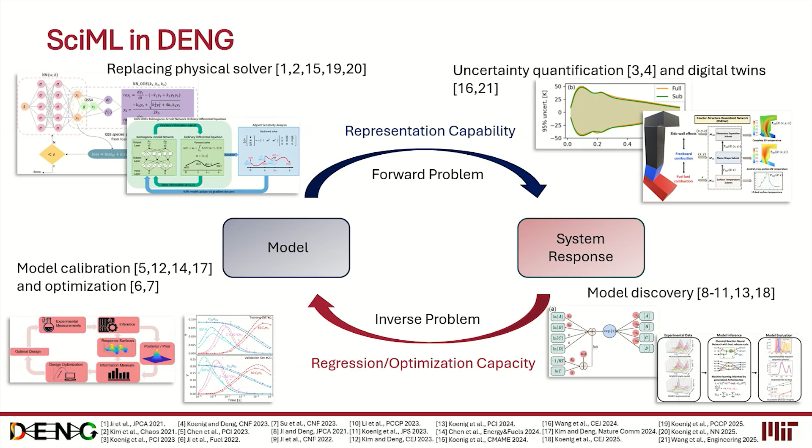So in that case, I'm thinking for the machine learning side, we can really utilize the capacity in terms of representation, try to help us compute things faster, more accurate, and so on. And eventually, if we can build something called the digital twin, which I will talk about later, such that we can predict what's going to happen to the physical system, we have a better chance to control that.

So towards this, for the past 4 years or so, our group has conducted a lot of research tasks surrounding these forward and inverse problems, particularly trying to infer models from experimental measurements and try to fast forward the computations and be able to model the entire systems.

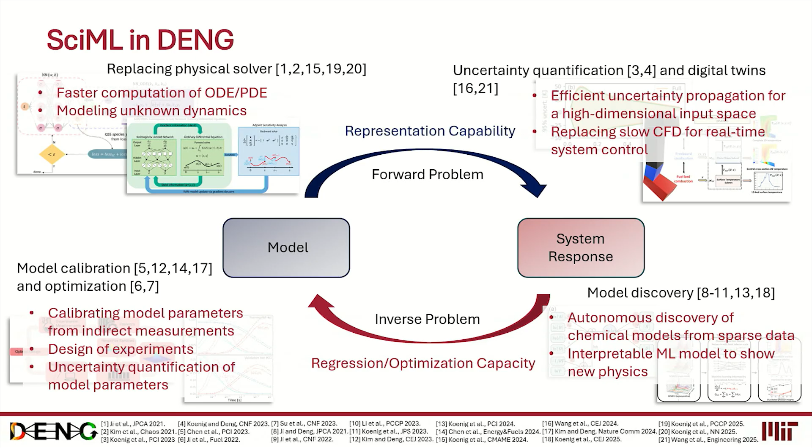In today's presentation, I'm going to pick 2 stories to share with you. Specifically, one on the inverse problem is that we want to see if we can predict the thermal runaway for lithium-ion batteries. And the second is showing you some of our recent work on trying to build digital twins to describe combustion or general combustion systems.

In terms of lithium-ion batteries, I don't think I need to emphasize the significance of that and the increasing trend in terms of deploying a lot of lithium-ion batteries for EVs as well as for grid storage, right? But we also hear about scary news about electric vehicles catching on fire, data centers just catching on fire without any physical destruction of the batteries, right?

So not only can we mechanically abuse the system, such as introducing a crash to the batteries, but also with batteries just working on their own or even sitting there, there could be some self-heating process going on such that it can trigger the so-called thermal runaway and eventually trigger fires of lithium batteries.

As we probably already know, lithium-ion batteries have many components. It has a cathode, anode, electrolyte, and also some intermediate species, such as the interface between the electrolyte and the anode, right? That's called the SEI interface. So actually, all of the components can undergo heat release processes under different conditions.

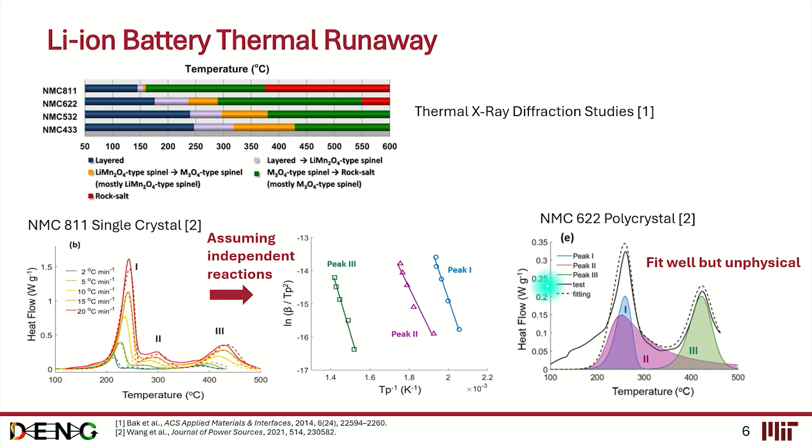However, it's unphysical. You can take a look at the second, this purple-colored shaded area. Basically, what this means is that the second stage decomposition starts to happen even before the first stage happens. So this tells us one very important lesson. For any data-driven modeling approach, you could fit the data very well. However, it could be unphysical, right, which would prohibit you from having a reasonable and predictive model.

So the way we try to deal with it is: how about we still maintain the data-driven modeling approach, but we embed physics into the modeling approach such that we can be confident about the fitted model that we have. And the way we embed physics is through this framework called chemical reaction neural network, developed by my group about 4 years ago.

So essentially, this is what happens: we can write the general format of chemical reactions. And we know that for general chemistry, we need to comply with the law of mass action. And this is how the law of mass action is written. And we can linearize this term and then have an exponential activation function in the front. So mathematically, this is identical.

But then if we take a look at this and try to explain it in terms of a graph, we immediately see this is something familiar to us in the neural network world. Basically, you have a linear combination to this neuron, then a nonlinear activation, and then another linear transformation into the output layers. So if you have experience with neural networks, you can identify there are many parameters, biases, activation function, etc.

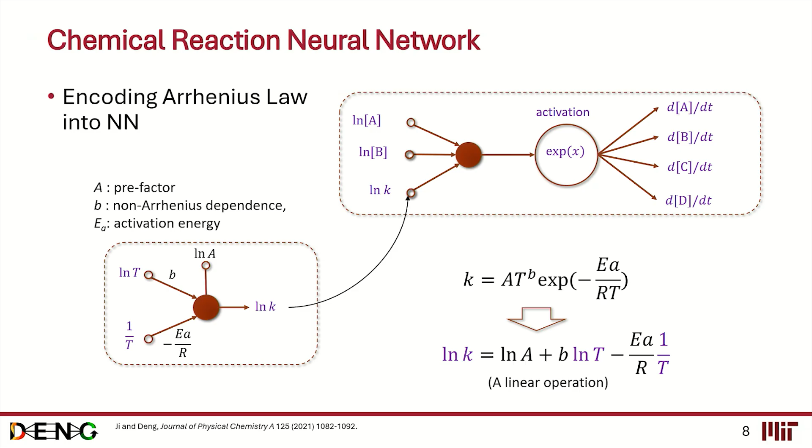Similarly, we can encode the temperature dependence into the framework as well to make sure that we satisfy the Arrhenius law, which is also generally true for chemistry as well as for these battery systems. So in the end, we can put everything together so that we can model a set of reactions that describe what's happening in the system given some experimental observations. And what's good about this is that we do not need to assume what type of reactions we have, as long as they are generally applicable for the law of mass action as well as Arrhenius law.

So whatever you learn, the parameters are of two kinds. On the hyperparameter side, you essentially learn how many species should be involved and how many reactions are enough to describe your system. And the other connections are the physical parameters that go into the physical system. So in the end, we completely open up this black box and make it a transparent box, essentially a physical model.

Particularly for the applications to understand the thermal runaway of lithium-ion batteries, we can actually leverage additional physical insights that we can get from the literature, especially from the material scientists. For example, previously I told you that we identified that there are 3 stages in the thermal decomposition, and they're happening in a sequential way in 3 stages. So we can actually incorporate that information into the architecture of the neural network as well.

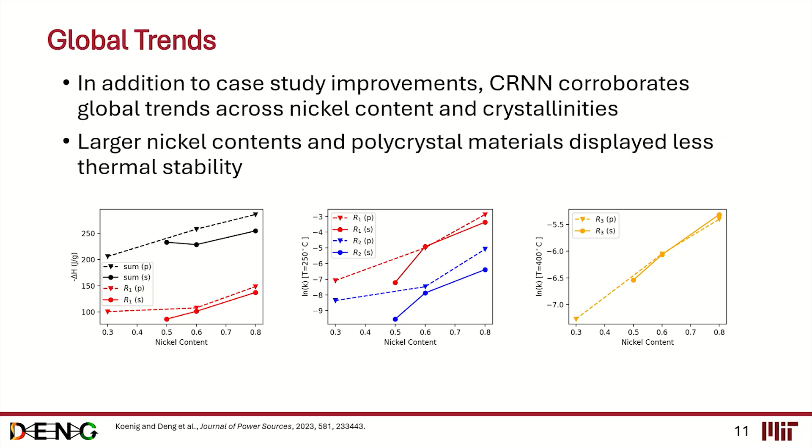After that, we would be able to apply this to a wide range of materials to understand why certain materials are more stable thermally compared to other materials. For example, we can compare the trend of different nickel content and make sense of why a higher nickel content is less thermally stable because of the decrease in the activation energy, etc., and be able to understand why single crystals are more stable than polycrystals.

We were very happy about it until we realized that across the literature, in addition to that single group that did a lot of experiments, there are also other people trying to repeat the same experiment following the same procedure. However, at their best, this is what all the experimental groups across the world can get. We will see that, well, generally we have the same trend. Some peaks happen at the same temperature, but not all the peaks, right? And sometimes you have 2 peaks, sometimes you have 3 peaks, etc. They all claim to follow exactly the same procedure and utilize the same material.

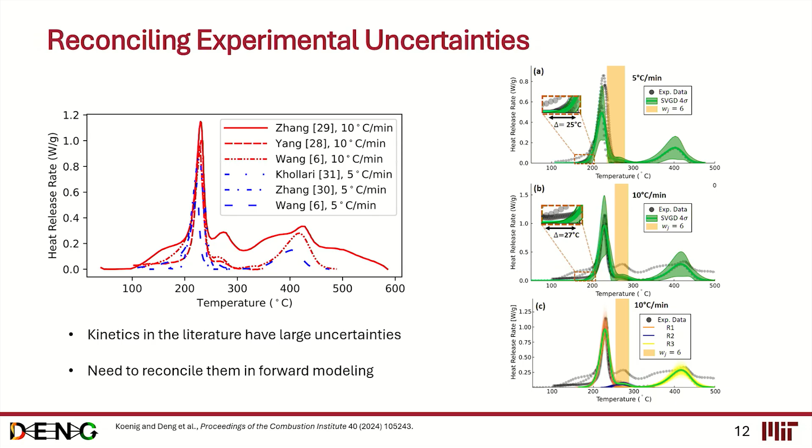That actually showed that the experimental data itself is highly uncertain, with experimental errors and uncertainties. So our model needs to be able to accommodate a wide variation in the data. We presume they are true, but they have uncertainties. So we developed a further module to model the uncertainties in the experimental data, such that our model would be able to capture the uncertainties and give us an ensemble prediction of all the possible scenarios, taking into consideration the variations in the chemical kinetic parameters.

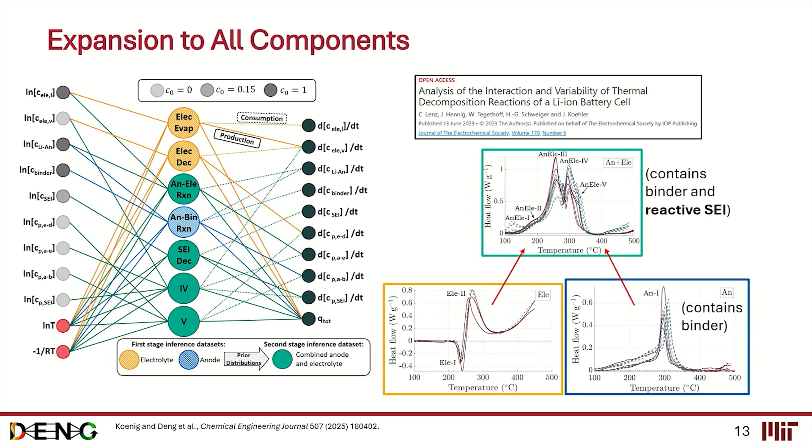For example, if they could have a clean experiment with the electrolyte, they can just take the electrolyte, put it in the oven, put it in the DSC and run it. But there are other cases, such as the SEI layer, where it's not possible for them to peel that off. So they have to take the entire electrode to the device, right? So I'm skipping a lot of the details, but essentially sometimes we can directly model the component. Sometimes we need to consider that the system is not clean enough, so we need to do it stage-wise.

As a result, you have to trust me, we are able to model the individual reactions associated with the individual components, as well as the interactions between different components. And now it's time to validate the model, but also try to explain, try to comprehend the single cell level experiment.

So previously I talked about that we can peel off the materials and look at the individual materials on the component level. And now we are ready to move forward by throwing one battery into the reactors and try to operate it and try to heat it up until thermal runaway happens and see if we can capture the dynamics well. So this is typically how a reaction would work.

It's called a heat, wait, seek process. You cannot see it, but actually this figure is keeping track of the time the battery spent in the reaction chamber, and the temperature of the cell. So you can control the heating rate and the environment inside the chamber. And the battery is heated at a relatively slow heating rate.

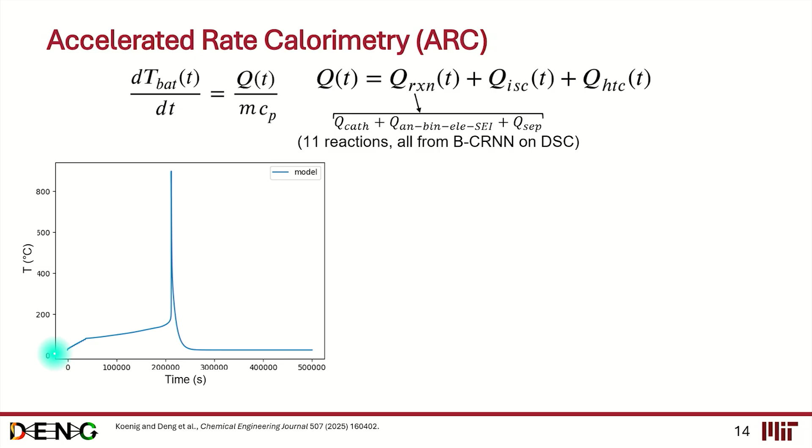And after you heat it, you wait a few minutes to see if the temperature changes. If the temperature doesn't change above your setting temperature, you can continue the heating process. And you can see that from point 1 to 2, at 2, after you stop heating the batteries, the battery will start self-heating. And this is the trigger of heat release processes.

And if you wait long enough, such heat accumulation and self-heating would eventually trigger the internal short circuit by the melting down of the polymers, separators, and then you see the battery catches fire. And because now we don't have external heating, it's an adiabatic environment. This whole process captures the thermal runaway of the batteries. And eventually it would cool down after everything's burned off.

All right, so this whole process is done in the experimental setup called ARC, and we can try to capture the dynamic procedures via this quite complicated diagram. And then we can get as much as possible all the parameters that describe the mass and internal short circuit, etc.

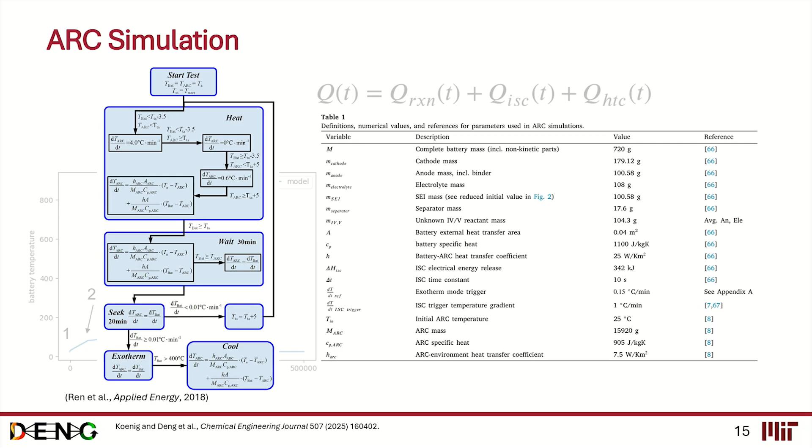And we utilize the model that I just described to you that Ben developed from the CRNN approach to model the thermal runaway. And here is a very busy plot, but I'll try my best to explain to you how we take our full model and try to understand the dynamics that we observe in the cell level experiments, and to highlight the importance of considering all the uncertainties associated with single components.

For example, this is an experimental measurement, and basically it's done across different chemistries, etc. Basically, this experiment is to show you that the onset of a thermal runaway depends on the cathode chemistry. However, if you recall the figure I just showed you, at this relatively low temperature, T is roughly 80 Celsius, you shouldn't have any dependence on the cathode. It's purely determined by the solid electrolyte interphase, solely developed by the SEI layer.

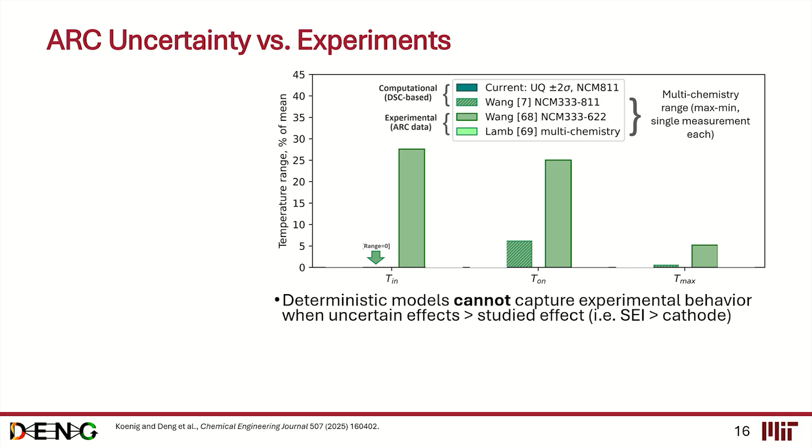So if you do it in the deterministic way, you wouldn't be able to capture the influence because in your model, nothing should depend on the cathode. And this is not a single case. If you look at other metrics, such as the onset of thermal runaway, as well as the maximum temperature, for all of them, we cannot capture the dependence on the cathode chemistry.

This tells us the importance of considering the variations in the experiment and the result of deterministically modeling the chemical kinetics. Now that we are able to capture the uncertainty, we would also be able to simulate all the cases with all the possible chemical kinetics. So what Ben did is to do a lot of random samples of the possible chemical models so that in the end we have an ensemble of the predicted dynamics of a single cell put into this ARC experiment. And the dark green is what we get.

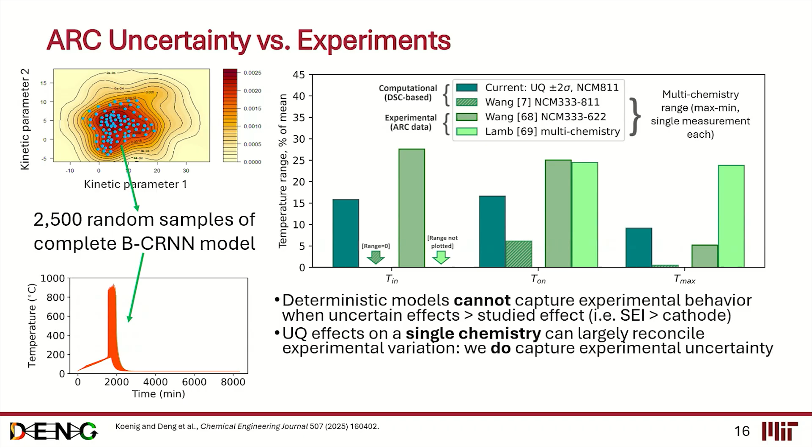We can roughly capture the dynamics and especially the variation across the literature, why across different chemistries we have different sensitivities in the three metrics, right? So the take-home message is that due to the complexity of battery materials, sometimes due to the labeling of the manufacturers, but most of the time due to the usage of the batteries, you don't have pure materials. You don't have all the same SEI layers, etc. You do have a lot of experiment uncertainty.

So when you come up with the chemical model to describe the dynamics, you actually need to consider such uncertainty. If you only take the deterministic one from a single experiment, you will not be able to capture the variations that we observe in the experiments.

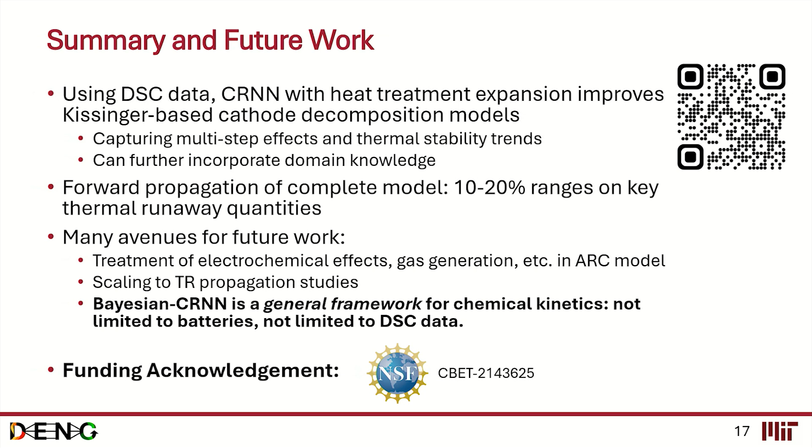So in this part, a brief summary is that I try to demonstrate to you how we can incorporate the physical intuition or physical evidence across the literature and use that to inform how we design our machine learning framework. And collectively, we can build individual models to describe different components of lithium-ion batteries. And then we can put them together to describe on the cell level how a battery would behave under thermal abuse.

And I introduced to you this Bayesian CRNN, which is a framework that can deal with not only the chemical reactions inside the batteries, but it has this promise of dealing with the general chemical system. So I just showed you a story on the inverse modeling side, and now I'm going to show you how we can accelerate the CFD calculations and try to do the predictions at a system level for energy conversion systems, and particularly for combustors.

We're interested in the terminology called the digital twin, and many of you might have already heard about it. Depending on the area, the definition could be slightly different. So in the combustion community, essentially what we want is that in the physical world, we want to be able to visualize and model a real combustor. And the digital twin is a digital replica of that system. We want to be able to visualize the flame inside the system.

We want to be able to measure everywhere how the emissions go, such that we can optimize the system by optimizing the design or the operations to enhance the safety of the combustors, to enhance the thermal efficiency of the combustors, as well as to minimize the pollution and emissions from the combustors.

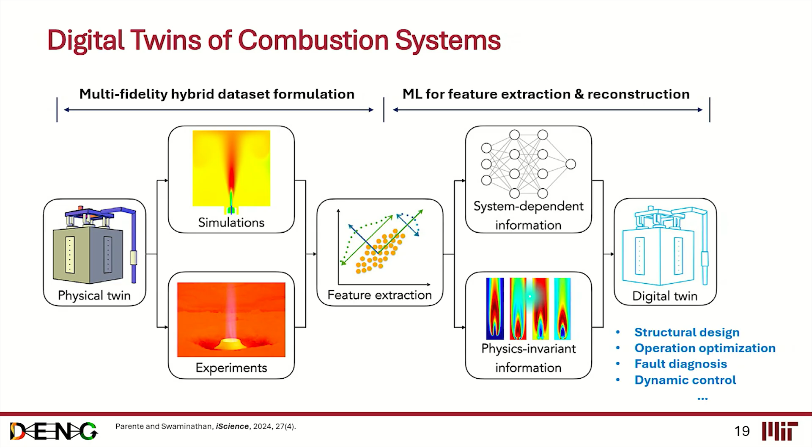And the key message is how we can utilize the world from both simulations, that is CFD, and later on you will see these very expensive CFDs, as well as some measurements, but with a caveat that it's a very hot environment. It's impossible for you to stick sensors into the combustors and measure every component you want to measure, right? So basically, how we can combine the information from both worlds and be able to describe the combustor systems, with the help maybe from some intuitions or reduced order analysis that we could have on the theoretical side.

So the key challenges we're trying to overcome are threefold. First of all, for a real combustor, you have very complicated fuels, and sometimes the fuel will get injected at different stages and different timing. And you can have air coming into the system at different locations, at different velocities, etc. So essentially, you have a relatively high dimensional space for the operations. When we say high, it's about order of 10 parameters that you can control, right?

And in order to visualize them, to have all the information, one way of doing it is to conduct computational fluid dynamics. But now we are talking about a highly turbulent flow that we need to resolve at the level of maybe micrometers, and we need to resolve a combustor on the level of meters, right? And we need to resolve in time and space. We are talking about millions of grid points to resolve such CFDs. So you can imagine the availability of high fidelity simulations will be quite limited.

And eventually you can say, well, I can turn to help from experiments. However, as I mentioned, it's very unlikely for you to be able to stick a sensor in to measure the flame temperature. It's gonna burn down. And for emissions inside the reactors, it's impossible for you to measure that. Sometimes you get measurements on the surface near the wall. Sometimes you can have a single measurement at the outlet, but it's impossible for you to resolve every quantity of interest by purely measuring those.

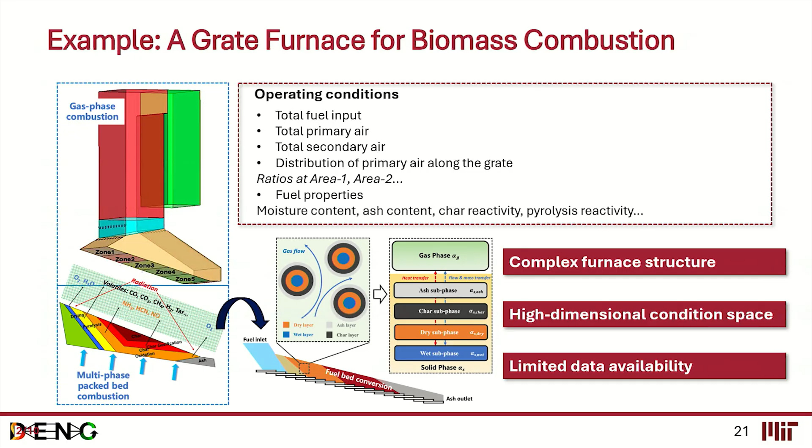So like I said, you have a lot of places to blow the air. You have a lot of operations. So in the end, we actually have 11-dimensional parameters that we need to operate in the real operation. And the physics and the chemistry are very complicated. You can try to do a 3D CFD of it, but it's going to be very, very expensive.

All right, and our end goal is, say I have a random combination for the operation, the 11 parameters. I just want to know, without doing the CFD, am I able to know the temperature distribution, how the flame would look inside my reactor? And this is what we generally do.

Skipping a lot of the details, essentially what we are trying to do is leverage the physical constraints or physical intuitions of the system. Because we know that the pyrolysis of the fuel bed is going to determine the gas phase species as well as the temperature distribution. So modeling the fuel bed and the temperature distribution after the pyrolysis is very important, right? And inside the combustor, there are the gas phase reactions. So we can actually combine the simulation.

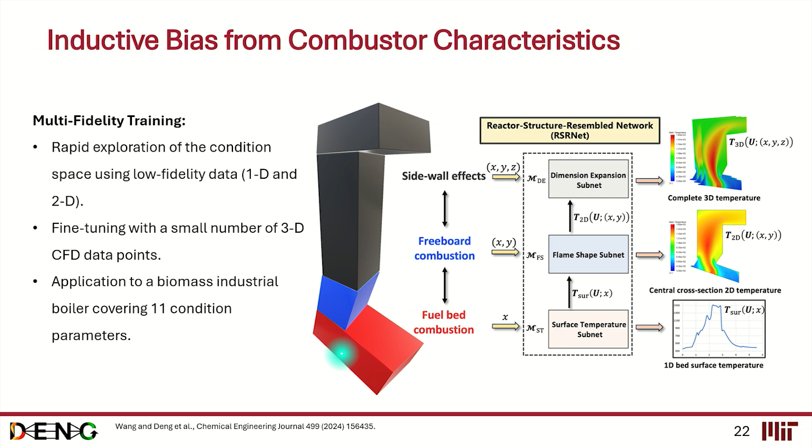It's a relatively simple 1D simulation for the fuel bed to get some characteristics out of it, build this into the whole framework, and blend in more information along the pipeline. So in this case, we do not need to simulate everything all at once in 3D. Instead, we could leverage some of the lower fidelity, one-dimensional information to build the overall structure and utilize a relatively smaller amount of 3D information to fine-tune the models.

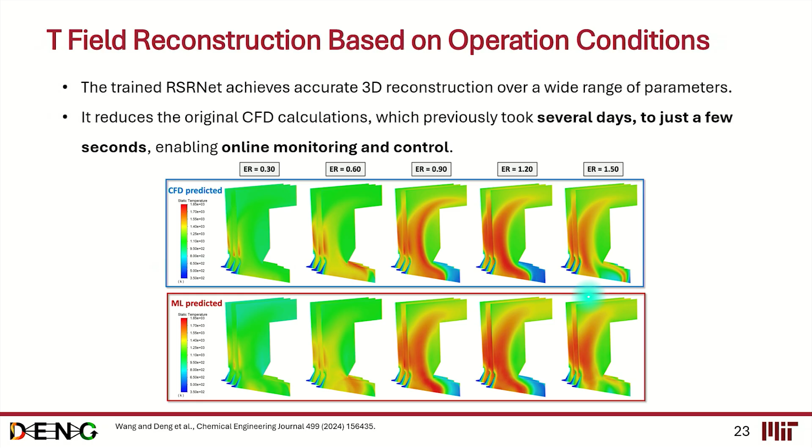I'm going to skip the details, but show you what we are able to achieve. So essentially, after we build this system, we are able to infer or construct the 3-dimensional temperature distribution inside the combustor, right? If you were to do the CFD, this would take several days on a supercomputer. And now, since you are able to build a surrogate model, you can see the fidelity is relatively high compared to the ground truth. We capture all the significant features in terms of the temperature distribution, the shape of the flame, and even the strength of the flame. And this only runs on a desktop for a few seconds.

So in the real operation, we want to know if we operate at a certain state, what would my flame look like? Would I have an extinction? Would I have overheating in certain areas? So you actually need the detailed information. And it's not possible to simulate the CFD on the fly. However, by utilizing this type of surrogate modeling, you would be able to achieve simulation at the level that you need to control it.

So we have now achieved the task that we can predict what's going on in the combustor given the operation states, right? Next, what we want to do is, can we leverage some measurements we might have of the system, although we know we will not be able to measure everything that we want to know. This is really inspired by mainstream machine learning for natural language processing and image processing.

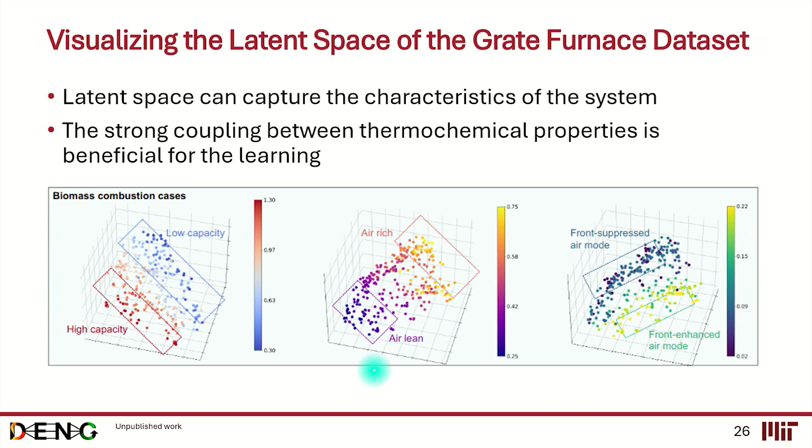Right? So we can separate the capacity and the equivalence ratio and the mode that we operate our reactors. So we further apply this to a bench scale, lab scale combustor that is burning ammonia and hydrogen as the alternative fuels. So you can imagine the fuel injects, and you have secondary, primary air, and then you have circulation zones, et cetera, very complicated. But the good thing about this is that the CFD is validated against a real experimental measurement.

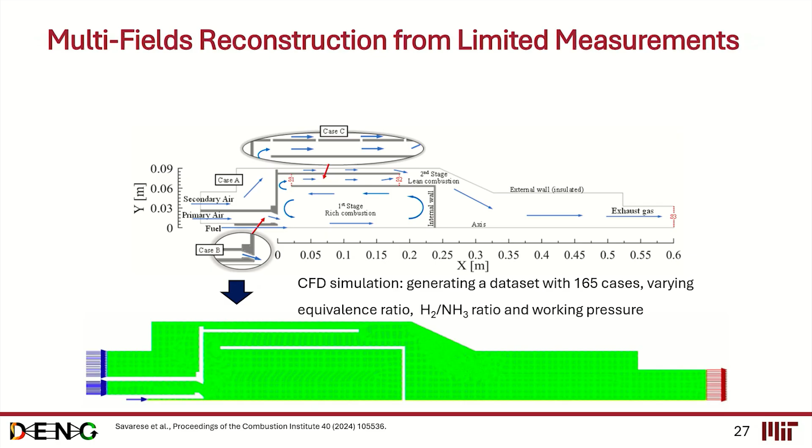And finally, we would say, what if the information I get is incomplete? I might get a single measurement from the sensors. I might know something about how I operate my system. Would I be able to process the information similar to the way I tell ChatGPT and give it a picture? So this is the unified one that can take the multi-modal inputs. And the core functionality is that we want to be able to reconcile the information from both the operation parameters as well as the measurement.

So to do that, we also try to reduce the number of simulations we need to train our model. As I mentioned, the 3D computation is really expensive, and we don't always want to simulate it to build our digital twin. We want to leverage low fidelity simulations. So in the total database, we can do roughly 300 simulations in a relatively cheap way for the 2D simulations. And for about 1/6 of it, we can also do the 3-dimensional high fidelity simulations. We use the 2-dimensional simulations to train a neural network, and then we utilize the 3-dimensional simulations to fine-tune.

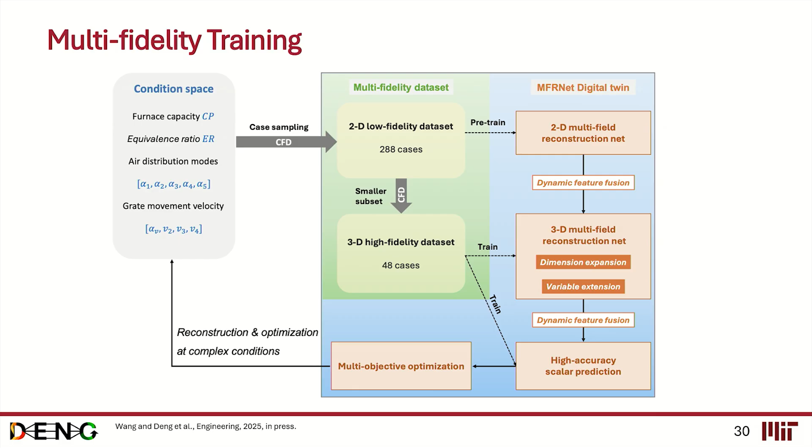But not only this, there are two core functionalities we want to achieve. First, this neural network is going to predict how the 2D distribution of certain species would look. But after the information from the 3D, not only will we be able to expand the prediction to the 3D flow field, but also capture quantities that didn't get simulated in the 2D simulations and only got simulated in the 3D simulation. And we will see how well we do in these two tasks. Essentially, the key feature is to describe the physical system, make sure we understand what's going on in the system and how different quantities of interest are connected with one another.

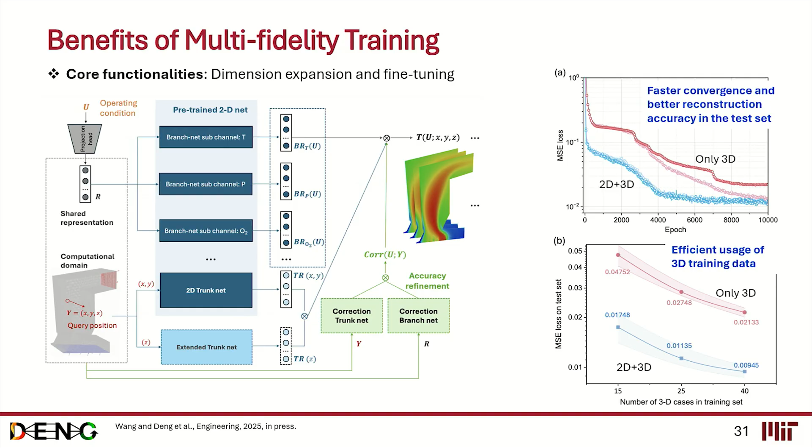But also, you want to pay attention to the efficiency of adding the 3D information, right? So for this case, even if you have 40 very detailed simulations, it's not going to be as informative as only having 15 3D simulations. And of course, now you would ask, then how much more expensive would the 3D simulation be compared to the 2D? So my group have told me that running a single 3D is going to be more expensive than running all of the 2D simulations, okay? So you don't lose much by adding a little bit of the 2D, but you do gain a lot.

All right, so basically this is to demonstrate that by blending multi-fidelity information, we can make good use of the relatively expensive and difficult to get 3D information. And this is generally how things would behave, because previously I only showed you the mean square loss. And in this one, you get to see that by adding a little bit of the 2D information, you are always able to improve the predictability significantly. And compared to the ground truth, we actually did a very good job.

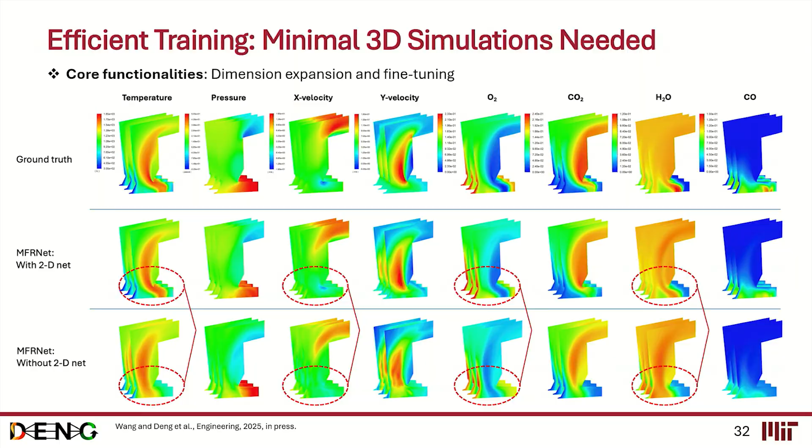And after we are confident that we can very successfully blend the information from multiple inputs, such as the sparse measurements, such as how we operate the system, then we can design a downstream task, essentially to guide us how we can most efficiently run our combustors. Sometimes it's decided by indicators such as CO, which is the indicator of how efficiently we run the combustion, and also the indicator from NO, which is a very strong emission, a pollutant that we want to eliminate as much as possible.

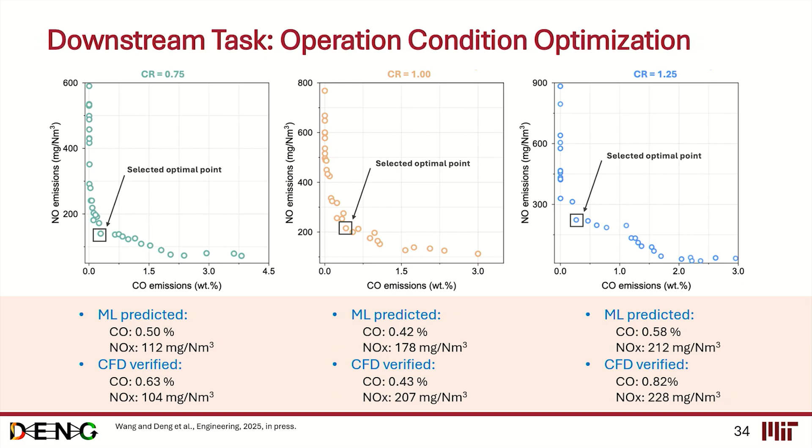So machine learning will help us to do the task. Even if I cannot directly measure you, I still get you the information you need to understand the system. And after that, we would be able to run the simulations really quickly. So bypassing CFD, we can do a wide scan of cases, try to minimize the emission from both CO and NO, and tell us how we should operate our combustors. And we can then use the posterior analysis to verify it with the CFD. As you can see, the prediction is very good.

With that, I would like to conclude the talk on the digital twin. Essentially, machine learning is trying to help us take the input from multiple sources. They collectively inform us of the nature of the system that we are trying to understand. So next, we are interested in being able to predict the dynamics of the system and eventually have this predictive capability, so that we can integrate the predictions from the digital twin and inform how we should control our parameters, how we should run our combustion, such that we can have a control loop to leverage the significant reduction in the computational time of the digital twin compared to the CFD solvers.

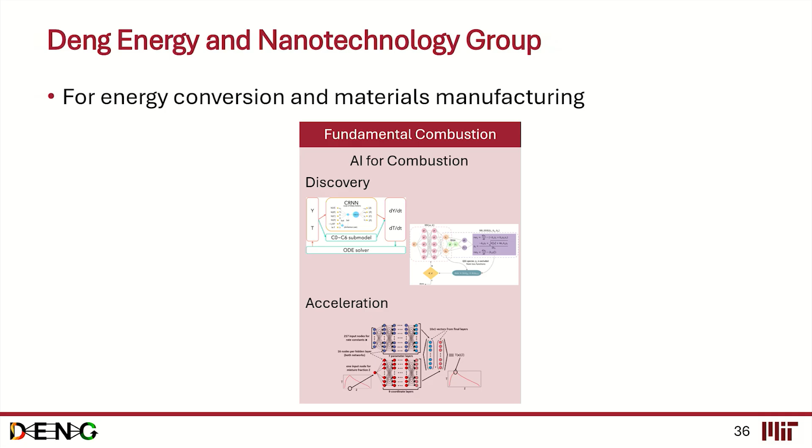And today, I mainly focused my talk on the scientific machine learning part because I felt that this was not something I covered significantly in the talk I gave 2 years ago. But still, we have the experimental component. Taking the knowledge we have from the fundamental combustion science, we can tailor the applications in terms of making materials, such as battery materials. The recent MIT news and the video about our group's work focuses on that, burning things to make things.

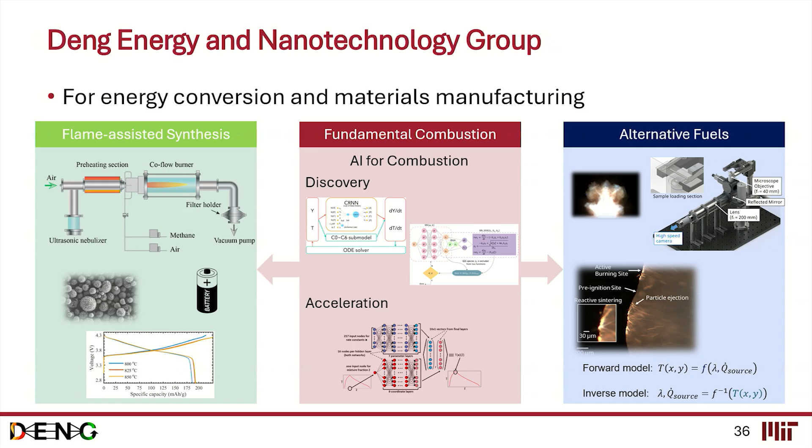And on the other side, we are also developing solid fuel and alternative fuel to try to mitigate emissions by the combustion of fossil fuels. And although with the time I can only share some of the work, I do have a wonderful team sitting in the audience that contributes to all the 3 thrusts in the group. All the audience are very welcome to connect to my wonderful students and staff and postdocs to hear more about the research progress in the group.